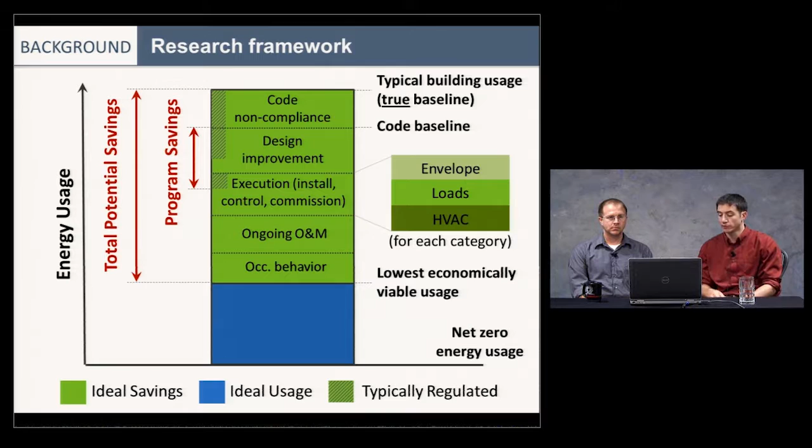So this is just kind of a framework to understand the pieces of energy savings that we looked at in our research, with the hypothesis that if we are to begin looking at these other areas, we can probably show some economically achievable savings that we're not currently pursuing. And the goal of this research is to understand what those segments look like, and also do some rough quantification based on just a couple of buildings to show an order of magnitude for that savings potential. Yeah. We kind of rank the different savings potentials such that programs could potentially spend their time developing programs in areas that would be most effective and bring the most savings into the program.

Now just to talk a little bit more specifically about what we did in our study. Our methodology followed a pretty simple, straightforward 5-step process. The first step was to identify a list of buildings that have gone through our new construction efficiency programs that have been occupied for over a year. Going through our program, there was an initial design iteration of modeling. One of our energy modelers came onto the design team, did a series of models in which they showed the energy impacts of energy efficiency upgrades, quantifying the energy savings, the incentives, and then a final version of the energy model was created that captured the total savings of the project for the final version of the design, and that savings was then attributable to the program.

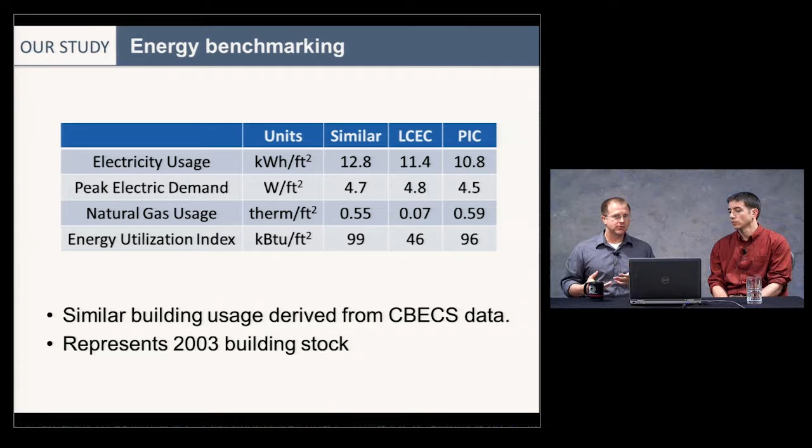Yeah, and just to talk a little bit more about the EUI, again, it's one number that represents the entire building energy usage, and it's on a per square foot basis, so it really allows you to talk between buildings, between building types, between building sizes, and that's how we're going to present our results from here on out in terms of one energy number.

We then gathered a lot of information about each building. We started out going back over the design documents that we had from the original analysis, checking the as-builts, checking the specs, making sure that our model was in line with the design documentation. We then gathered utility bills for as many years as we could. Again, at least one is required, but I think we got up to 3 for the Lucier Center.

That gives us the monthly natural gas and electric consumption that's going to come in so handy when we're doing our model calibration. And then we did walkthroughs of both buildings. So we spent time understanding the lighting: was the actual installed lighting accurate with respect to the plans? What were the plug-in equipment inventories? We checked HVAC nameplate information, as well as several other things.

And during those walkthroughs, we also interviewed the building owner and maintenance staff, just to see, first of all, how they use the building. When are people there? When are people not? And if there are any issues associated with the energy consumption. Maybe a piece of equipment wasn't working, and they could tell us about that. We also interviewed members of the design team, mostly to see how they interacted with the program and if they had any suggestions for better interaction in the future.

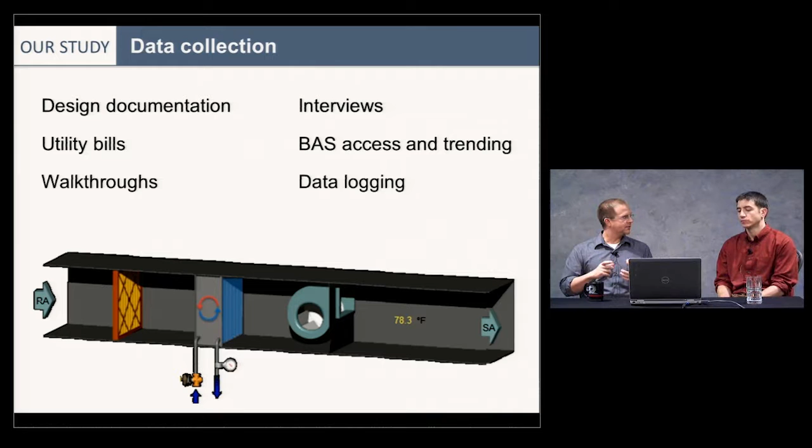Once we had all this data, we used it to calibrate our energy model. And by that I mean, we started with our original analysis, which predicted energy usage and energy consumption of the building. And then we sequentially updated the software, put in actual weather year, and then updated all the different building components of the model until our predictions of energy usage from the model matched those of the actual utility bills. We followed ASHRAE Guideline 14, specifically the whole building calibrated simulation approach, as kind of a sequential prescriptive way of doing calibration. We used the Trane Trace 700 models that were originally created for the program, and the first step was the software update I mentioned.

Now, Trace, as well as many other energy modeling softwares, rolls out updates periodically, and each one is meant to create a more accurate energy modeling technique. So the algorithms within the energy modeling are just improved over time. And in that way, software developers are helping modeling accuracy outside of programs. We then switched out the typical meteorological year, which we usually use for the design level modeling, for the actual year that we are trying to match the utility bills to. And this had an effect on the energy usage of the models as well.

We then sequentially updated the building components. So with envelope, for instance, we found that in actuality, the wall U values were 11% better than our original model showed. The roof values were a little better as well. It was hard to find information about the windows, though. It's just difficult to get glass specifications. But we were able to really accurately calculate the installed interior lighting power, which for the Plymouth Intergenerational Coalition, we had to update from 1.1 watts a square foot to over 1.5 to capture its full energy usage. We also had to add exterior lighting, which wasn't originally included in the energy model.

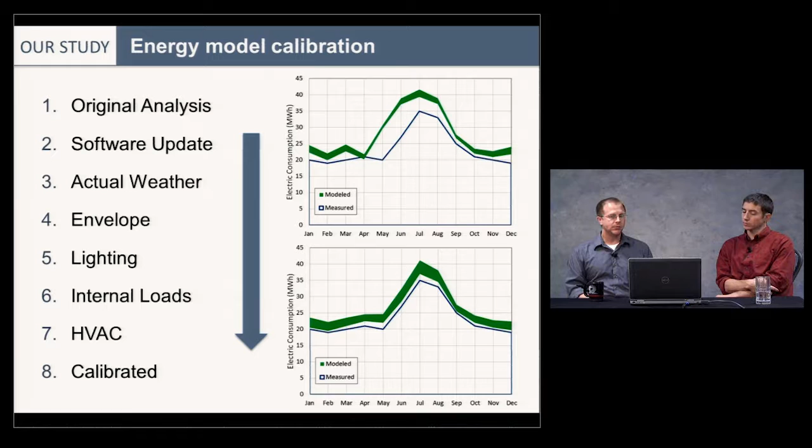You can see in green, at least the bottom portion of the green, the proposed model run. And you can see a large gap between the blue and the green. After a calibration process, the gap is very, very much minimized. Additionally, the area of the green, which is the energy savings, has changed as well. And we'll talk about the magnitude of that change as we get into the results section of the webinar.

Now that we have calibrated energy models for both of our buildings, we study them and try to check out areas of additional savings that we could capture. Those areas fall into kind of three different groups. There's scenarios, sensitivities, and code impacts. Scenarios are areas within the traditional scope of new construction programs, but that aren't always captured by new construction programs.

The expanded scope category is meant to kind of analyze a scenario under which the modeler has plenty of time and is not constrained by time or budget to understand all the energy impacts of the actual design, like the exterior lighting and domestic hot water that we mentioned previously.

The best practice scenario is meant to study what additional savings could have been obtained by the buildings had the design team and owner had, I guess not unlimited budget, but a substantial budget to go after the economically viable technologies that are available. So more efficient equipment, more efficient lighting. And in that sense, we used Advanced Buildings Core Performance Guide for guidance, as well as just our own experience from designing buildings.

In that scenario, we looked at more roof and wall insulation, better windows, better lighting, daylighting controls, ERVs, energy recovery, demand control ventilation. So a lot of different things that the buildings could have done had they had more time or more budget to explore.

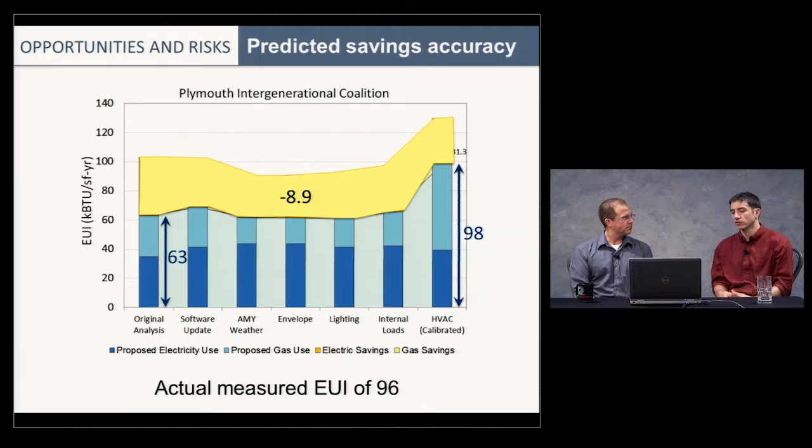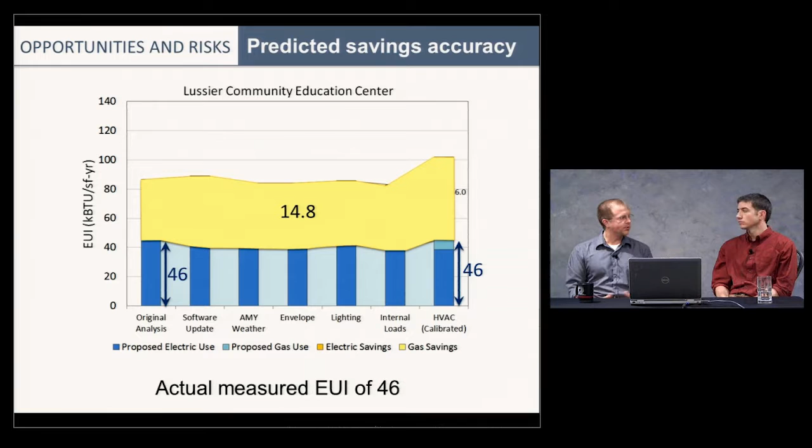Taken together, you could kind of think that the calibration effort leads to a little increase in savings. Maybe it's a wash. With two buildings, it's a little hard to tell, but generally, it increases the amount of savings. Yes.

And that's the calibration effort. Now we're going to get into the scenarios, the expanded scope and the best practice scenarios. Right. Thanks, Scott. So, the calibration exercise was very interesting. We learned a few things. Again, the fact that one building went up, one building went down is understandable, and that's not really the key result that we were shooting for anyway.

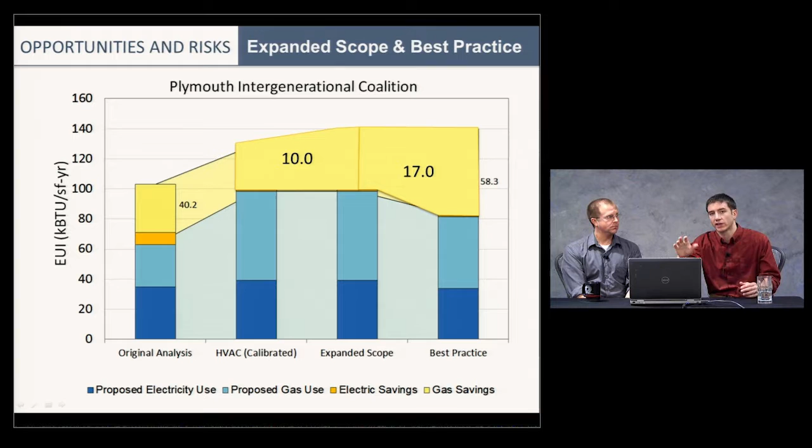In this case, we were looking at additional savings from adding in energy recovery, demand control ventilation, so some HVAC measures covered the majority of that savings increase. We were not able to get those into the more basic HVAC system that was actually put into the building. Thanks, Scott. Oh, and you'll notice the best practice scenario has the opposite effect on the results. The overall baseline we kept the same. The proposed decreased because we put more measures into the building.

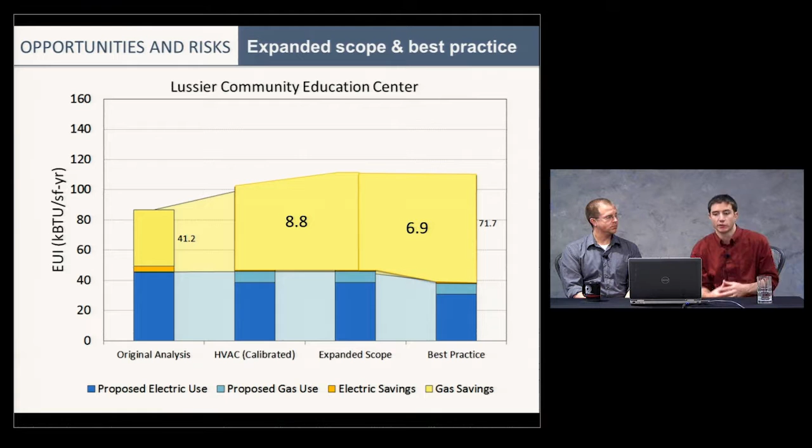We see very similar impacts with the Lussier Center. If we're able to expand the scope of the program's influence, we can gain an additional 9, roughly, kBTU. And if we're able to push the owner to achieve best practice, we see an additional 7 kBTU. Yeah. So all those things are on a similar order of magnitude, sort of 10 kBTU, for just expanding our scope and being more comprehensive, and an additional 10 if we're able to push them a little further on the measures that we already covered.

Yeah, so that was the scenarios, and now we can talk a little bit more about the sensitivities. Again, this is comparing a lower performance case to a higher performance case. And for the unregulated sensitivity, this table is obviously a little busy and we don't expect you to read everything. If you're very interested in what we did specifically, that's all in the report. But I just want to highlight a few things that we looked at in the unregulated sensitivity.

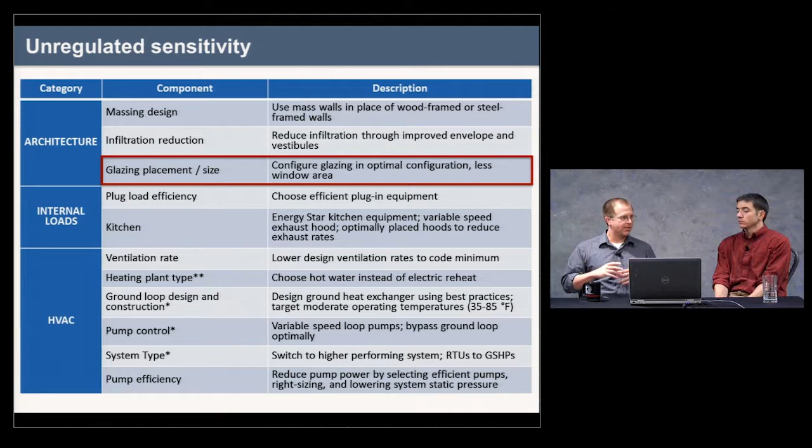The first, under the architecture component, is the glazing placement and size. So the glazing is optimally configured, and the window area is not maximized, but rather optimized to let in enough light without letting too much heat out. Under the internal loads, we looked at kitchen equipment. Specifically, the exhaust is kind of the major driver with respect to energy usage in the kitchen, and we looked at variable speed exhaust hoods, optimally placing the hoods to minimize the amount of exhaust they need, all of which had an effect on the energy usage of the buildings.

And then in the HVAC category, the codes say what amount of ventilation air you have to provide at a minimum, but they say nothing about the maximum. And as you increase ventilation rates, there's definitely an improvement of occupant comfort.

But there's some point at which you're just bringing in a lot of outside air without improving it and using a lot of energy accordingly. Yeah. And the code doesn't prevent you from just doubling your ventilation rate if you decide that's what you'd like for the building. So what would happen if the ventilation rates were lowered to code minimum?

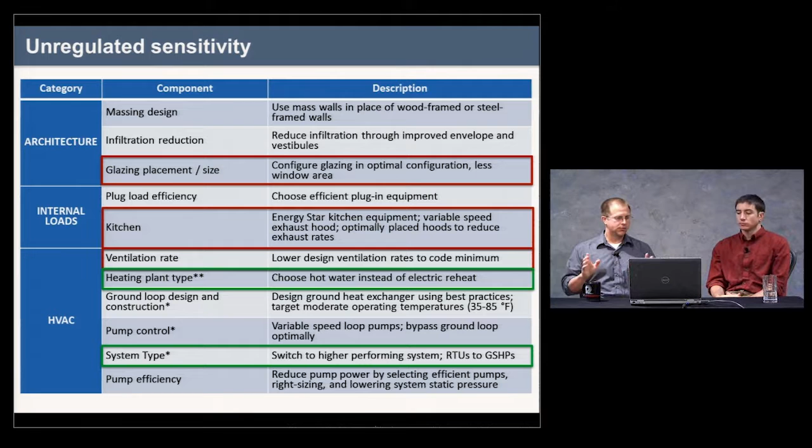And then we also looked at two system switches, one for each building. And by that I mean HVAC systems, specifically for the Plymouth Center, were switched from an electric reheat to a hot water, and for the Lussier Center, from rooftop units to the ground source heat pumps. Because system type is not regulated either. Yeah. You're free to choose whatever system type you would like for your building. As soon as you do, then you have to meet some minimum level of efficiency, but you can choose any kind of system type to provide that heating and cooling.

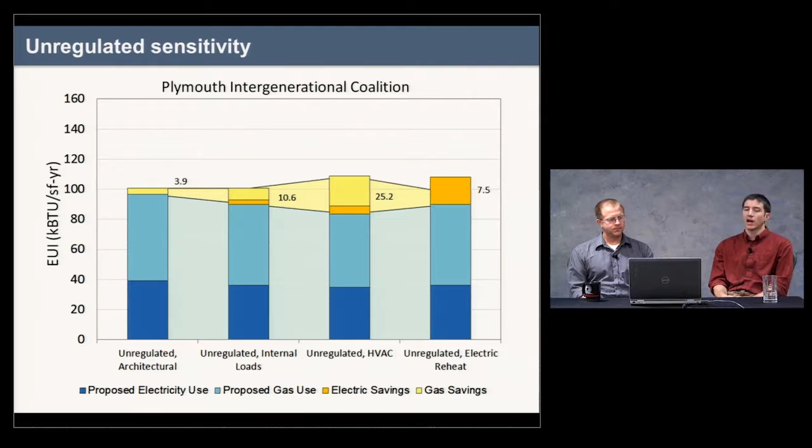Mm-hmm. The system switch was kind of a weird one because it's really about fuel switching from electric to natural gas, and not about a more efficient HVAC system as a whole. Yeah. So that bar's a little misleading. Yeah. It would be higher in some buildings with some system switches. Yeah, true. And that's actually played out dramatically for the Lussier Center.

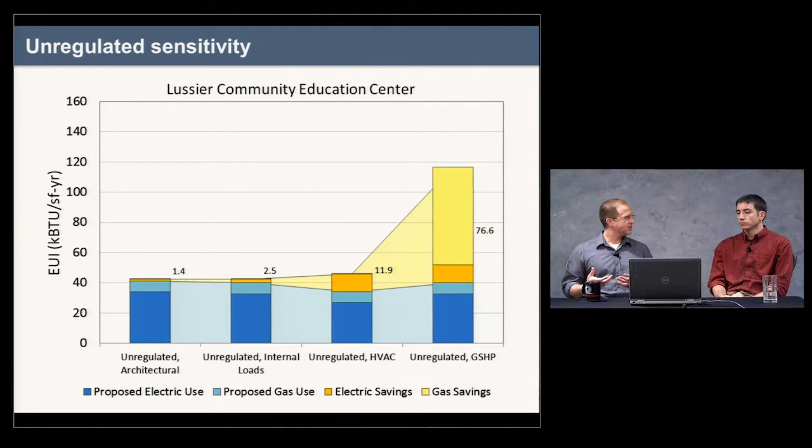The architectural and internal loads components didn't have that big of an impact, but the HVAC did. And again, that's the ventilation, properly designing the bore fields, the pumps as well. But then the biggest amount of savings came when you made the switch from the standard rooftop units to the high-performing ground source heat pumps.

So now we go beyond the usual scope of programs, which is the design phase, and we go on to the later phases of a building. First, with execution, we look at things like infiltration reduction. So how well is the envelope actually put together? That's not usually handled under a whole building program, but it absolutely has an impact on energy usage, of course.

How well the lighting controls are actually implemented, how well the VAV system is programmed, balanced, and otherwise controlled. Usually there is some ability during the design phase to set up a sequence of controls, and the better that's done, usually the more effective the controls will be in the space. But there's a huge amount of impact from bad versus good execution of those controls and balancing and so forth. And all those things have a pretty significant impact on the building.

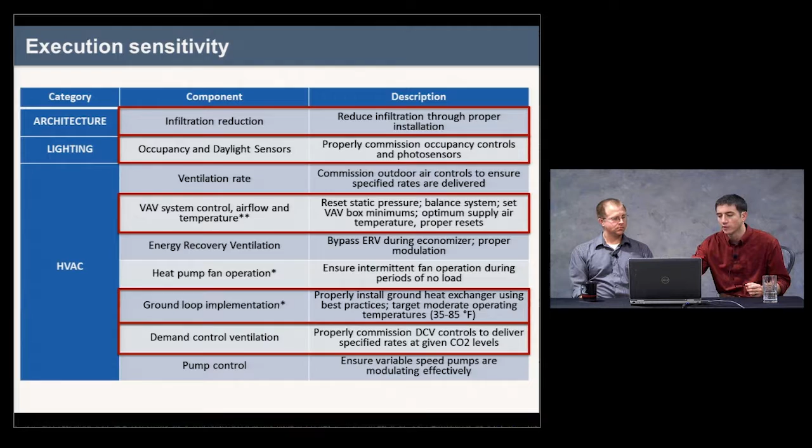Similarly with, as Scott mentioned, ground loop implementation. You can have a really high quality installation of a geothermal bore field and one that's not quite at that level. And that'll make a big impact on energy savings. That usually doesn't come into play in these programs. Similarly with implementation of demand control ventilation. Yeah. And we'll get into the results of these last sensitivities at the end after we talk about them each individually. For the operational sensitivity, again, we're talking about maintenance, cleaning of the building and its equipment.

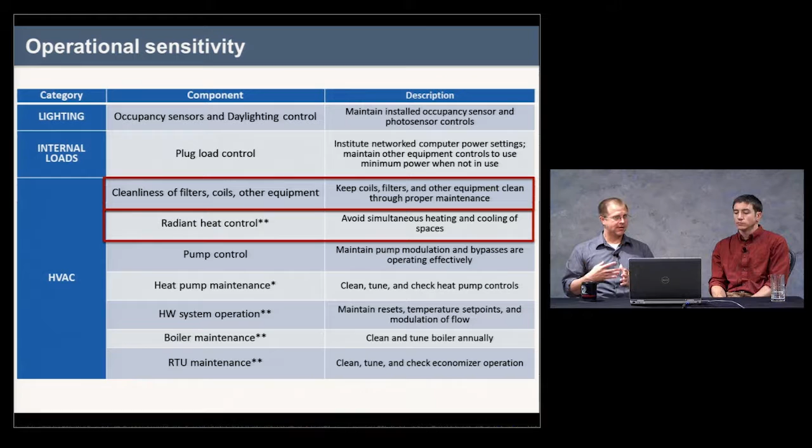In the HVAC system, the major driver was just keeping the filters and coils clean periodically and making sure that any systems that have the potential for simultaneously heating and cooling are not doing so. And then standard maintenance of your heating and cooling equipment.

And then finally, we look at occupant behavior. Again, something that occurs well after design, but there's potential for some energy savings there. We found that the big impacts were in areas where you had significant energy-using equipment, like kitchen equipment or photocopying equipment or process loads, and not just computers and monitors and TV screens. There's much less impact from occupants in those cases. So the kitchen was a big area of impact.

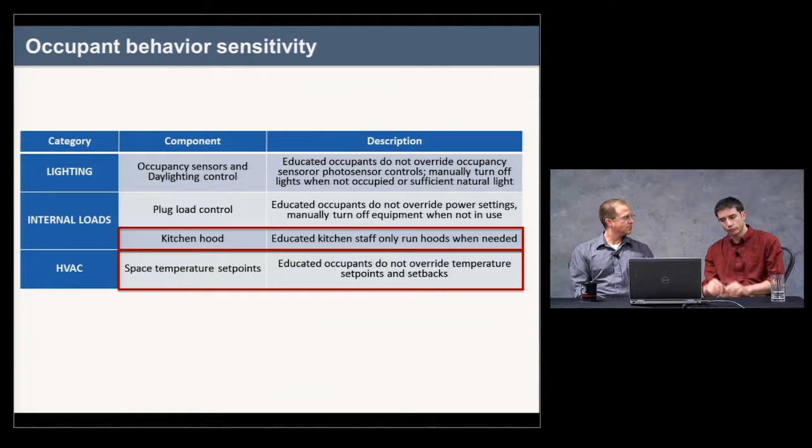And then whoever has control over the overall thermostat set points also has a large part to play. So in terms of occupant behavior, it may be more about influencing the behavior of a very small number of individuals in the building. Yeah, the key ones. And then this is the result. This is the coup de grace, the results of all of our analysis. Yeah, if you're going to take away one slide in your mind, this might be it.

Yeah. Shows for each of our scenarios and our sensitivities the EUI savings, the high and the low end. The major one being that unregulated system switch from a low-performing rooftop unit or PTAC unit to a high-performing ground source heat pump unit. Yeah, or going from electric heating to some other form of heating. Yep.

The unregulated components of design, so specifically like ventilation rates being at their minimums, and window placement. Yeah, window placement had the next largest amount of energy savings potential. And then the two scenarios and two of the remaining sensitivities had a very even impact. The expanded scope and best practice, execution and operational sensitivities were all very similar, like 12 to 13 EUI of savings. And then occupant behavior was the lowest on the tail end, about 8 or 9 EUI of savings

for occupant behavior programs. And before you move on, it's worth mentioning again that the savings that the programs demonstrated in these buildings was on the order of 30 kBTU per square foot, and all of these potentially could add substantially to that. Most of them are in the range of 10 to 20 kBTU of additional savings opportunity. Yeah. That's a great way to couch the savings. 10, 20 may not mean much, but when you compare it to the actual savings, it puts into perspective how much potential there is out there.

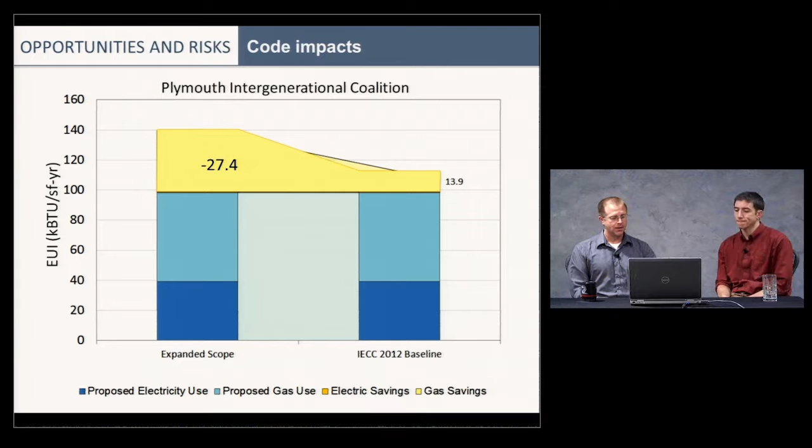And taken together, that decreased the baseline and therefore the savings on the Plymouth Center by almost 27 EUI, which is essentially negating the majority of their savings. Their proposed building is very much in line with the stringent code at this point. At the Schuetter Center, however, the savings wasn't reduced nearly as much. In fact, it only goes down by 10. There's still a lot of savings there, which is really getting to the fact that the Schuetter Center is a high-performing building, still performing well, even relative to a more stringent baseline.

So taken together, 10 and I forget the other one, but the stringent code was, on average, a reduction in savings of like 19 or 20, which means that you have to go after programs in a couple of the areas that we talked about previously in order to make up for that loss. Yeah, that's a good way to think about it.

So to conclude, and we're going to cover this more in part 2 of the webinar, we have a series of recommendations that come out of just looking at 2 buildings in detail. And those are program policy type recommendations. And they all lead to opportunities for more savings. We're talking about improving the scope and completeness of calculations, addressing unregulated components and HVAC system types, incorporating some amount of quality control in the execution or installation, then looking at O&M and behavior after the building's constructed, and then finally looking at actual code compliance.

And if you're to summarize this into sort of two main takeaways or adjustments you could make to program design, they would be to try to expand your baseline and cover more ground than programs are currently covering, and then to try to expand influence later in the building's life to the actual installation of some of these measures, for example, and beyond.

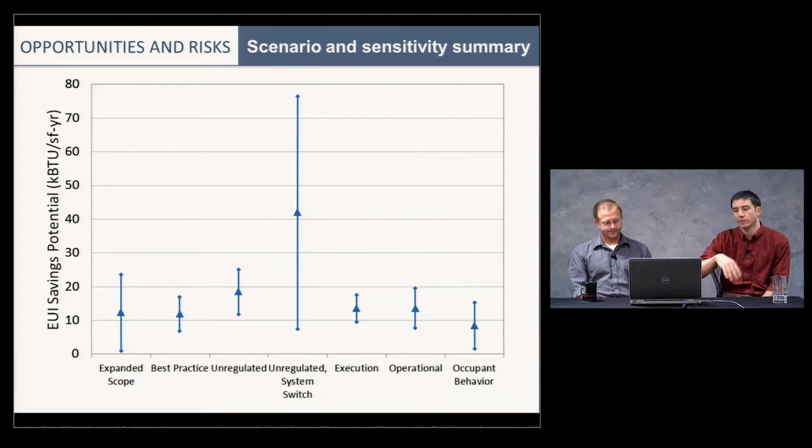Right. So to maybe summarize it, within each of the points on this plot, we did account for interaction in all the measures we stacked up. But you could not take each of these points and stack them on top of each other. Yeah.

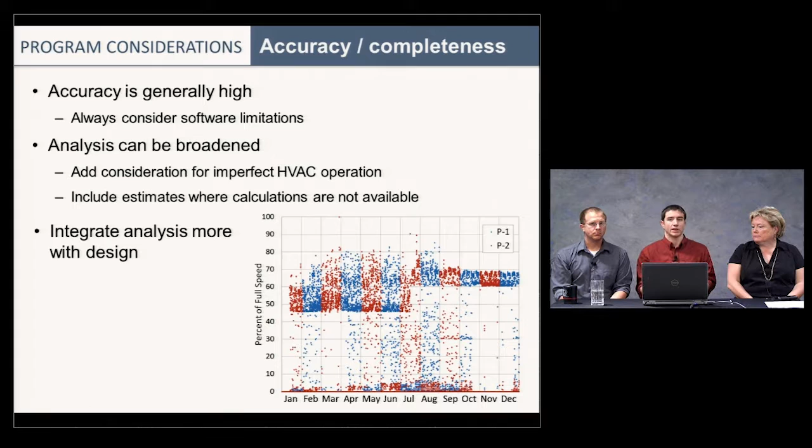First, when we calibrated our analysis from our program analysis to the actual building operation, we found that there were all these components of the building that were not operating according to design, and therefore not really operating according to the model. That's not to say that the energy improvements that were suggested by the program were not implemented right. It's more just a general phenomenon of building operations. Equipment never quite operates optimally.

This plot shows just one example of many. This is a plot of the speed of a variable speed pump in one of the buildings. According to design and according to control sequence, this pump should modulate down to 30% speed at the lowest loads of the building. And we see here in this plot, over a year of operation, it never comes close to 30% speed. In fact, for most of the year, it's up above 60%.

And we saw this with not just this pump, but with VAV system operation and modulation, fan speed, economizer operation and other areas of HVAC operation. So this just suggests that perhaps we need to, in our analysis, consider the imperfect operation of the building in all cases, which actually should create more energy potential for us to go after in saving.

The second area we saw analysis could be broadened is simply including estimates for energy savings where our current tools don't allow us to do a robust calculation. So there are limitations to the tools that we use for energy calculation, but if we have a recommendation to make and it can't be covered by the tool, maybe we should make an estimate and just make the recommendation anyway.

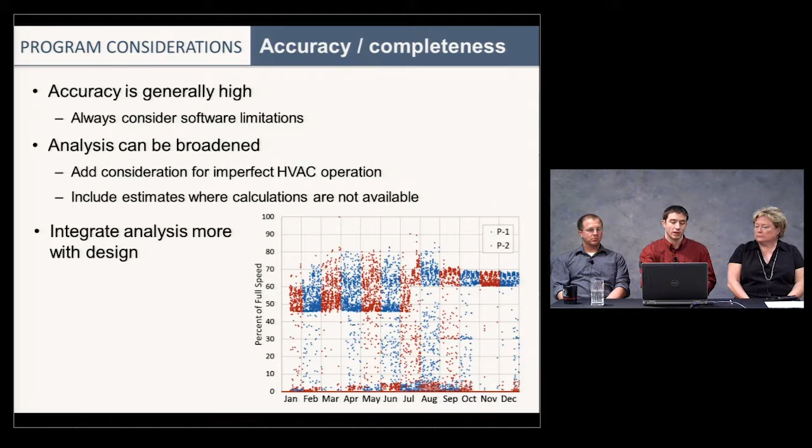The second recommendation area is in unregulated components. So there are a whole host of areas that are not regulated by code. Here I'm talking about code baseline. In program speak, we usually call that a regulated component, covered by the code baseline. There are areas that are not covered by that baseline.

Glazing placement in architecture. In terms of internal loads, the amount of plug load equipment, the design of the kitchen hoods and the layout of the equipment. In HVAC, the zoning of the building, the ventilation rates that are used. None of these things are covered by code and are not often baselined in programs. So there's an area for additional savings.

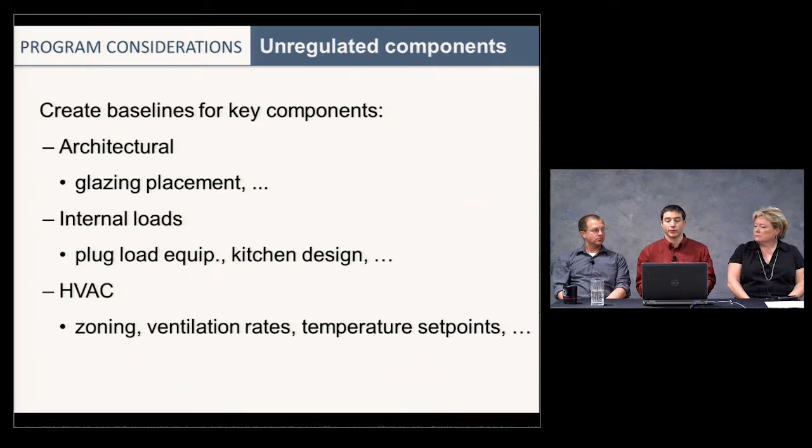Similarly, as we mentioned again in part 1, the biggest impact we saw was from the selection of the HVAC system type for the building, and that's not regulated by code either. Whether you choose a geothermal system or a basic rooftop unit system, the code doesn't tell you. So we're here suggesting one possibility is take sort of a three-tiered approach to actually have a baseline in your program for HVAC system type, and that can lead towards capturing savings on every project from HVAC system type.

When the program gets involved, you can determine how to choose the baseline. If when the program gets involved there is no system at all selected or designed, we suggest that the baseline is simply the typical system for that region. Now, some people point towards 90.1 Appendix G as a potential baseline, but Appendix G ignores climate, it ignores building type, it ignores all these things, and it's fairly rigid and simplistic.

Programs actually are operating in a given territory with a given set of design teams usually, and a given typical installation. So that's what should be used as the baseline in that region. What is typical? Usually you've got a few dozen previous buildings of that type that you can use as your baseline. If the program gets involved in a project and there are already multiple options on the table for HVAC systems, or maybe there's one option but there's the potential that it could be value engineered out, then the worst possible option is the baseline.

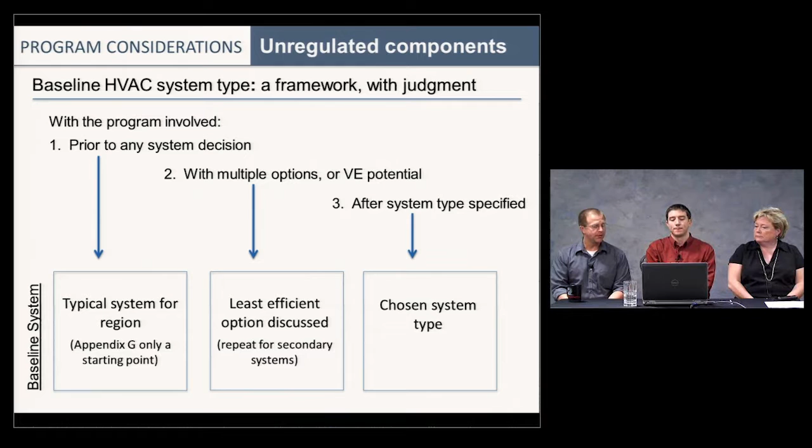Right. The later you come into the project, the less scope you have in terms of system type, system selection. Yep, there's just less room for changes to be made within the design. So that covered the first sensitivity.

The next is the execution sensitivity. And there we found that, again, we're dealing with quality installation, control programming, startup, calibration, commissioning. And that's commissioning of building components at the time of installation. We found substantial savings opportunity in the first webinar.

And basically, they could be used to require things like quality installation of air barriers, balancing of VAV systems, programming of lighting and HVAC controls. And that would not only ensure the savings that the program initially predicted, but also provide a few opportunities for additional savings on top of that.

Execution programs could be implemented by requiring commissioning in order to receive the initial incentive. It could incentivize commissioning directly by incentivizing a portion of the commissioning agent's fee. A program could also develop guidelines for specifying optimal equipment operating parameters or additional support for designing controls.

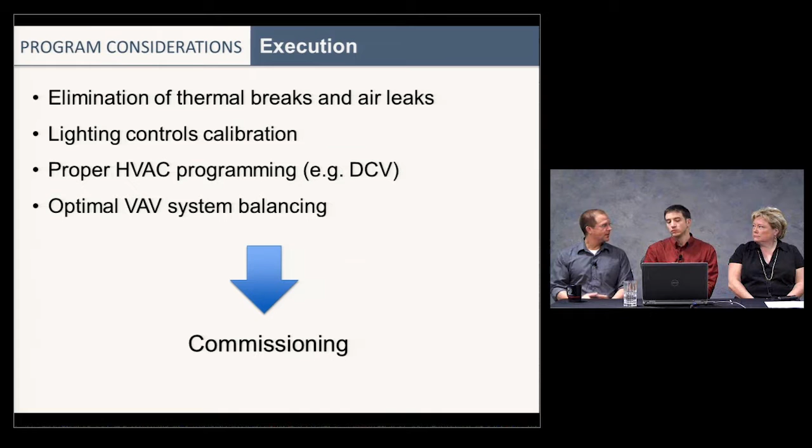A couple of our design teams, during our design team interviews, recommended that programs just provide more information about the best way to control or commission a system. And then moving on to the operation and behavioral sensitivities. We found that there's a lot of savings to be had by ensuring commissioning and proper installation, as well as good operation of the building once it's occupied.

And that kind of suggests a bimodal approach with respect to programs. They need to spend a lot of time early in design to get those big energy decisions and drivers correct: system type, orientation, massing. And then they tend to walk away from the building once the design is complete or the building construction is done.

But programs could really influence at the time of installation of building components, their commissioning, and then after occupancy, how the building is maintained and operated. So there's an additional component of time that programs could spend on a given project and realize this additional savings.

In terms of the operation and behavior, there's kind of two ways that programs could be developed. One is training, under which you could require a certain amount of training for building maintenance staff, or require a maintenance plan be in place in order to achieve incentives. A program could also provide that training directly surrounding key technologies that save a lot of energy, or develop guidelines and materials for maintenance best practices. Finally, they could incentivize creating and executing a maintenance contract.

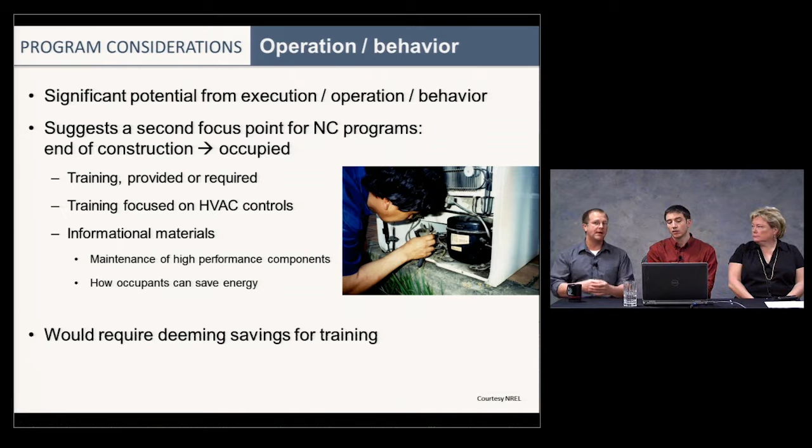And then we talked a little bit about the code baseline and how savings will definitely decrease with these more stringent codes. Point out that code noncompliance exists, but that it exists under a much less stringent building code. And as the codes become more complex and more stringent, the few instances of noncompliance that we found will likely only increase as the code is just harder to understand.

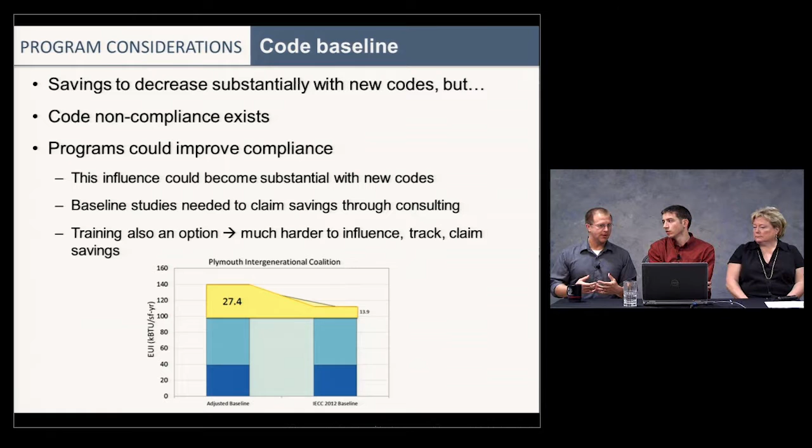And programs could help to improve compliance by educating design teams on how to meet code. It could also do so with training, although training is kind of hard to claim savings from. It's just a little more fuzzy of an area for savings opportunities. Generally, there's more research to be done in terms of how much additional savings is out there in terms of noncompliance. Yeah, but it seems like it'd be easier for a program to prove up savings by showing noncompliance typically in their territory, as opposed to trying to create some deemed savings based on training or something like that. Yep.

And then just to wrap up, there's kind of two areas that we recommend programs go after in terms of additional savings opportunities. One is just expanding the scope of their current program to include things like HVAC system switches, proper zoning, minimum ventilation rates. And the other is really influencing not the design, which is bullet one, but the installation and operation of the building, kind of at the tail end of construction and the beginning of occupancy.

I know there's a lot of work being done nationally to pursue outcome-based codes, and I'm interested in what differences you would have seen in your research or in your recommendations for program managers if we had outcome-based codes now.

I guess the first thing I'd say is that outcome-based codes are kind of the way to ensure energy savings. If you go and you measure the energy usage, then you know that the energy savings is occurring. It's often very difficult to take that extra step because of just the time involved. And if the project budget is such that you've already spent most of it with modeling and design, then it's hard to get to that next step.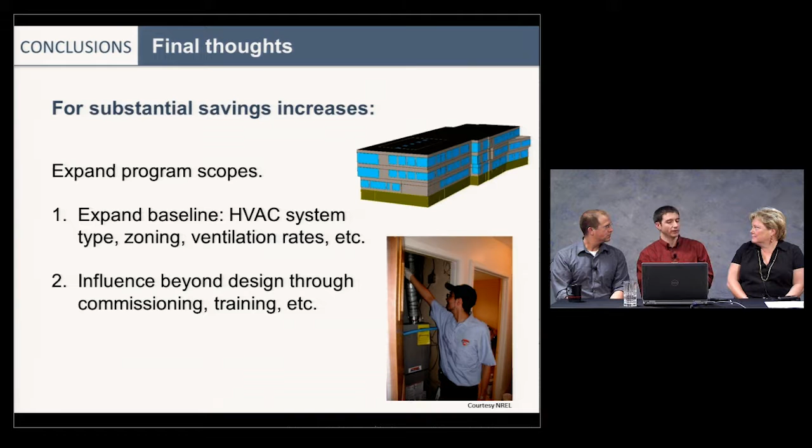I'm going to pick up all my mics and slide over and welcome Joe Kramer. We probably better test his mic so he can let you know what he found out in his research about connecting energy efficiency and manufacturing companies.

Okay. Great. All right. Well, figure out how to move this forward.

The goal of this study was to improve our understanding of how utility efficiency programs contribute to regional economies. And in this case, we're focusing on the Great Lakes region. The focus of our study is looking at manufacturers of equipment and materials that are used in the utility efficiency programs. We didn't cover other important players in these programs, program administrators, trade allies, and wholesalers and suppliers, all of which are important components and play a role in that. But our focus here is on the manufacturers of equipment.

So the concept for this study is pretty straightforward. We look at a utility program, trace the chain of service providers to the products that are used in the program, find out where those products are made. The important thing is that we're actually tracing that connection. So we're able to connect program A with product B, which is made in these locations.

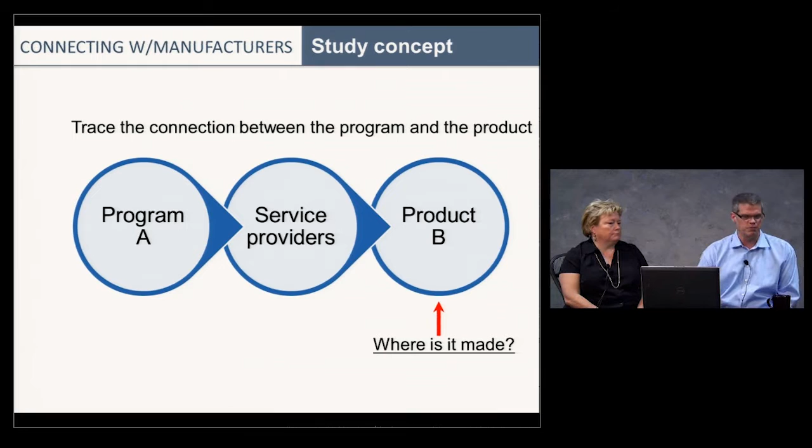The programs we looked at were all related to commercial retrofits. And we looked at two different states: in Illinois we looked at ComEd, NICOR, Peoples and North Shore Gas programs, and then in Michigan it was Consumers Energy and DTE Energy.

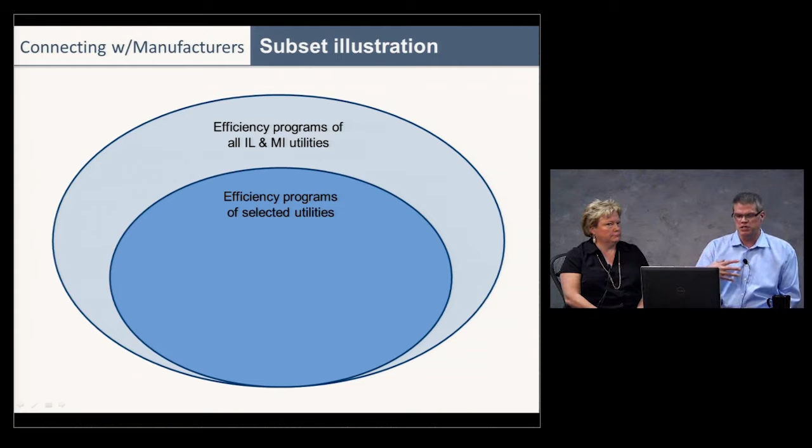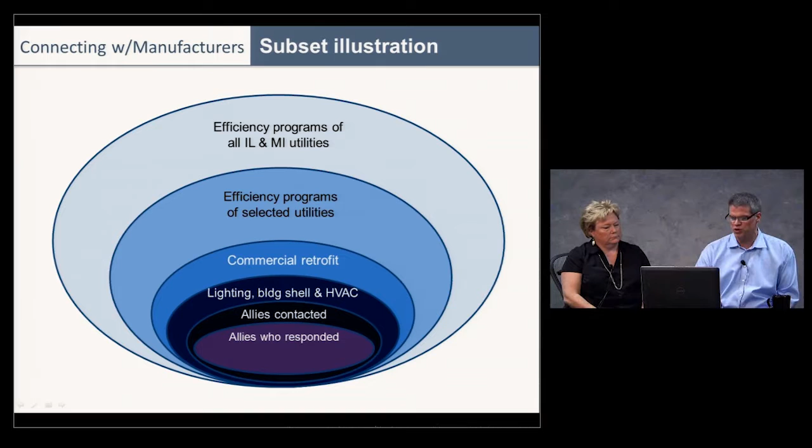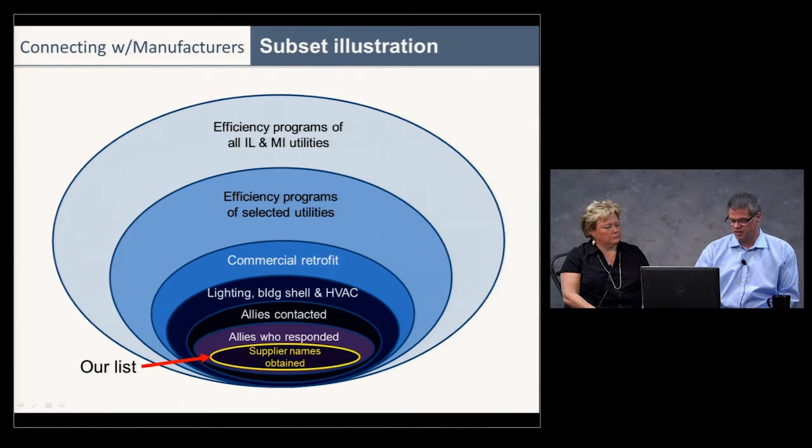We were able to get the contact information on only a small subset of allies working with those programs who we contacted, and some of that group responded, giving us names of some of their suppliers. So our list that we eventually generated was based on that list of suppliers we were able to get from trade allies. So needless to say, the list represents an unknown proportion of the actual manufacturers connected with these programs. It's not in any way presented as a comprehensive listing. So given this small piece of the pie, what did we find?

So what did we learn from this exercise? We found that these utility programs support manufacturing jobs throughout the Great Lakes region and beyond. We actually identified 85 manufacturing locations, if we look beyond the Great Lakes region, that are directly connected to those programs. The manufacturing sector, again, represents just a fraction of the economic benefit from those programs, and the other parts of the supply chain are also benefiting as well. And the Michigan utilities actually have incentives promoting purchase of in-state manufactured products, like the Buy Michigan program, that likely magnify the benefits for the state of Michigan. And finally, it's really important to work with the utility from the outset in a project like this, and their participation is really necessary to get access to program activity information.